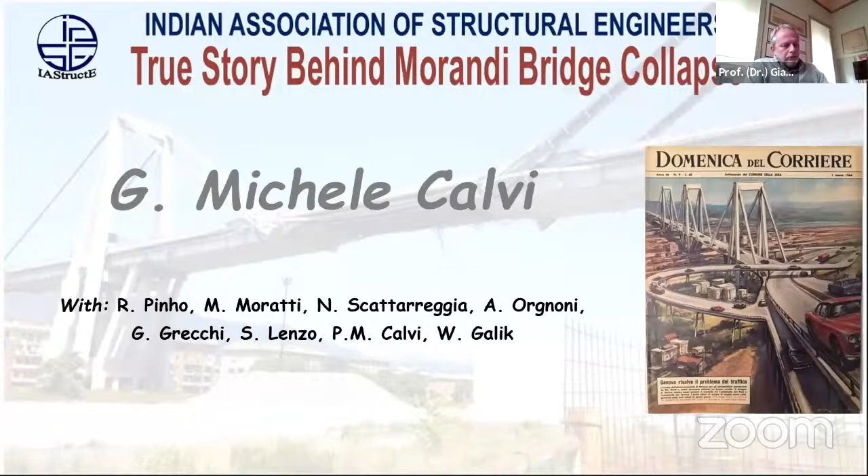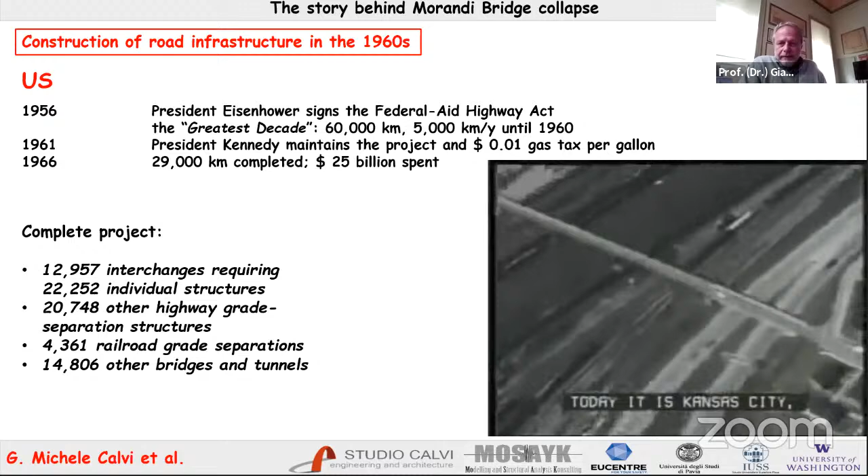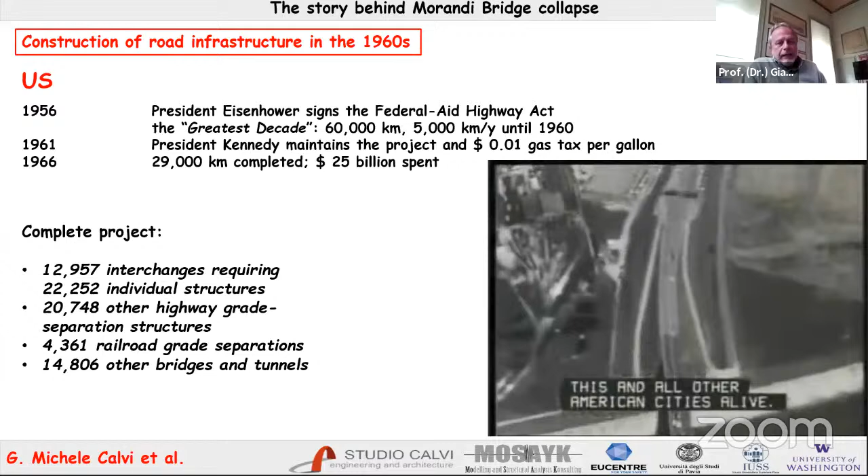This bridge was conceived in the early 60s and completed in 1967. It was a very special time for the construction of bridges and roads all over the world. In the US, the Federal-Aid Highway Act was signed in 1956 by President Eisenhower, starting the construction of the entire system of federal highways, which is still today the backbone of the road system in the United States. In one single decade, they were able to construct something like 30,000 kilometers of roads with an enormous amount of money spent.

What I'm showing is just a video that you can find on the web. I like very much to look at these very old videos and clips, where somehow it's a kind of story of a time, of an era.

In the US, this means that today they have a very high number of bridges that have aged and that can be in a difficult situation of maintenance.

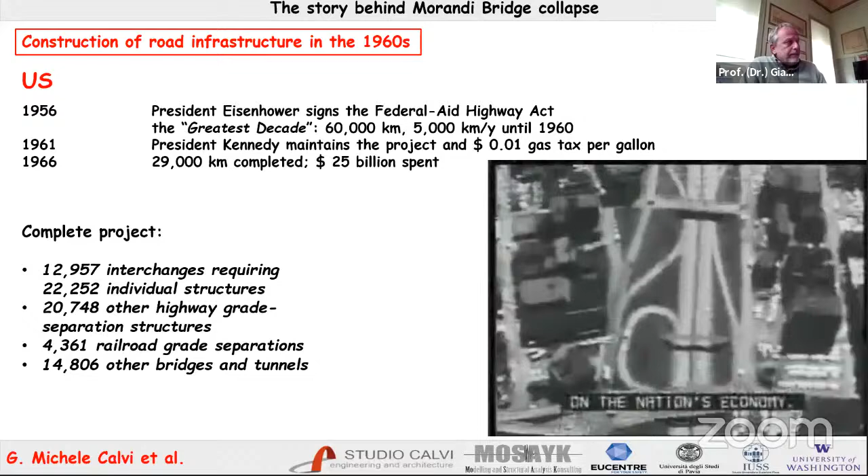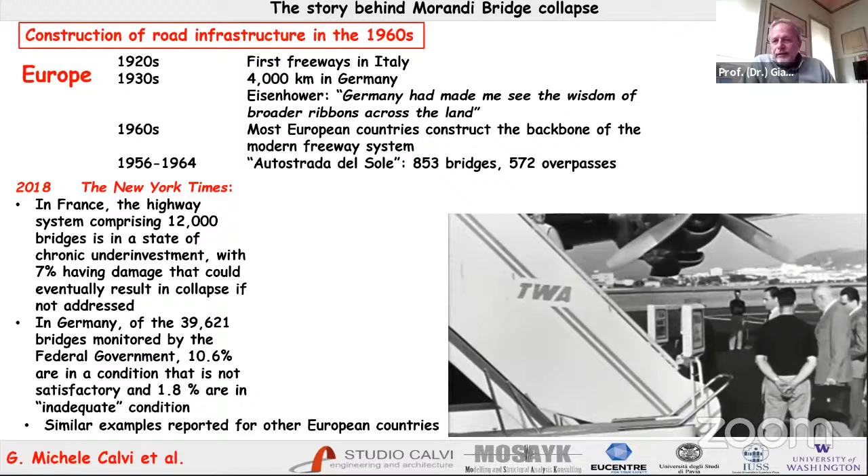But if we look at what was happening at the same time in Europe and in Italy, at a different scale possibly, this is another video that I hope you see. It's in Italian, so don't pay too much attention, but for me it's extremely interesting. This is the video of the construction of what is called the Autostrada del Sole, the freeway that goes all the way from Milan down to the south of Italy, also built between 1956 and 1964, crossing a lot of mountains.

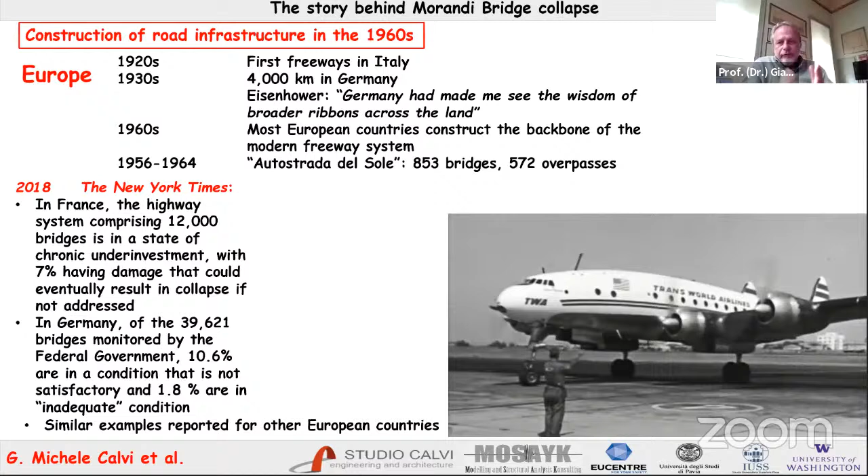You see Italian engineers going to the US to see what they're doing there and find out. In this single freeway, there are 853 bridges and 572 overpasses. So you can imagine and look at this, what you see now. It's an incredible way of construction for today, you don't do this kind of thing anymore.

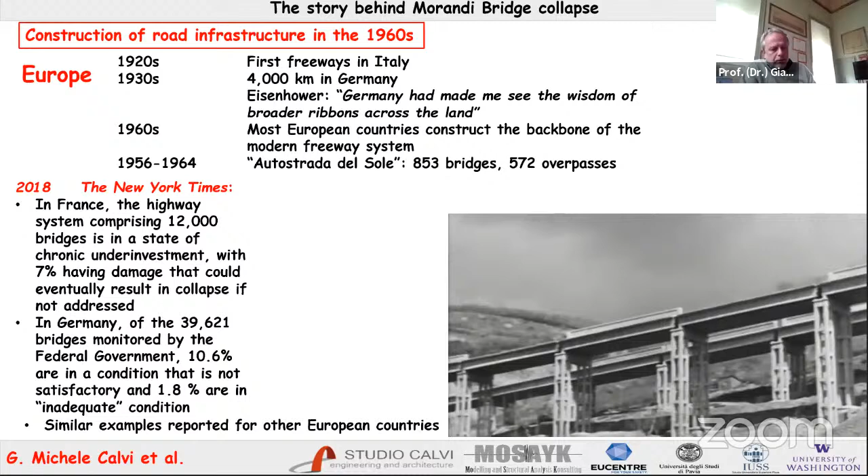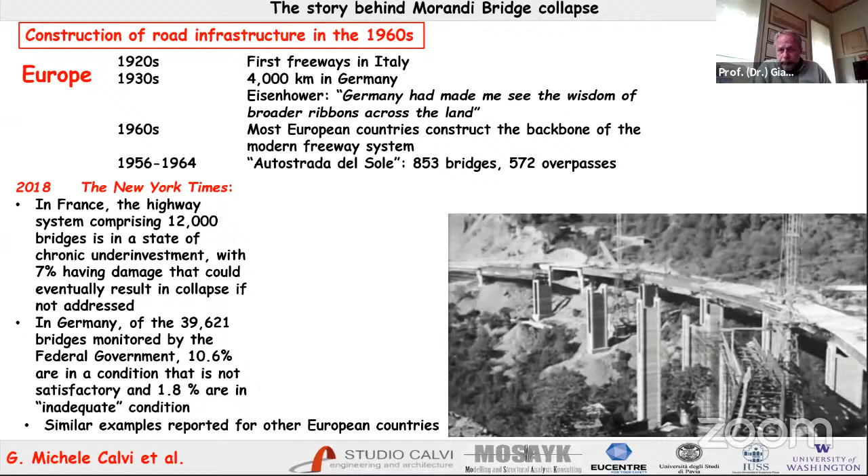But in Italy, we have a vast majority of bridges that are aged. Nothing like this happened anymore, well there have been bridges, but not so many. The same is true everywhere in Europe. In Germany, all the bridges were essentially bombed during the Second World War when the Allies entered Germany, and right after the war they were reconstructed, so most bridges have been built at that time. So the 60s have been a great time for construction, but we are now in a situation where a lot of bridges are in potential difficult situation of maintenance.

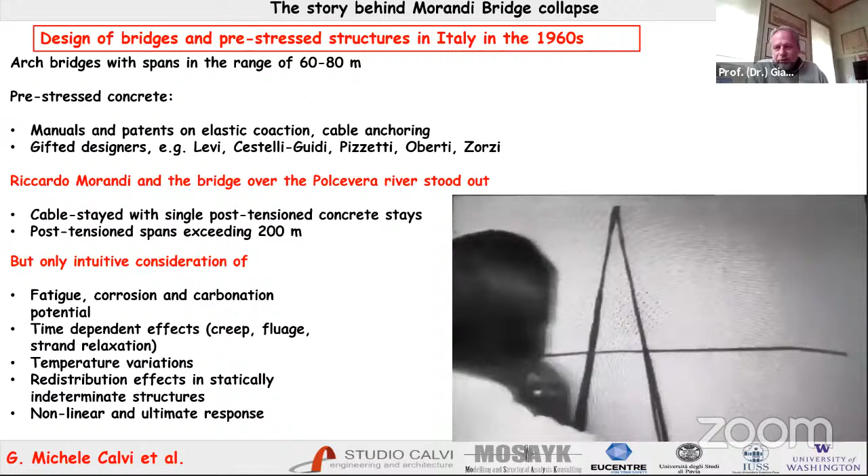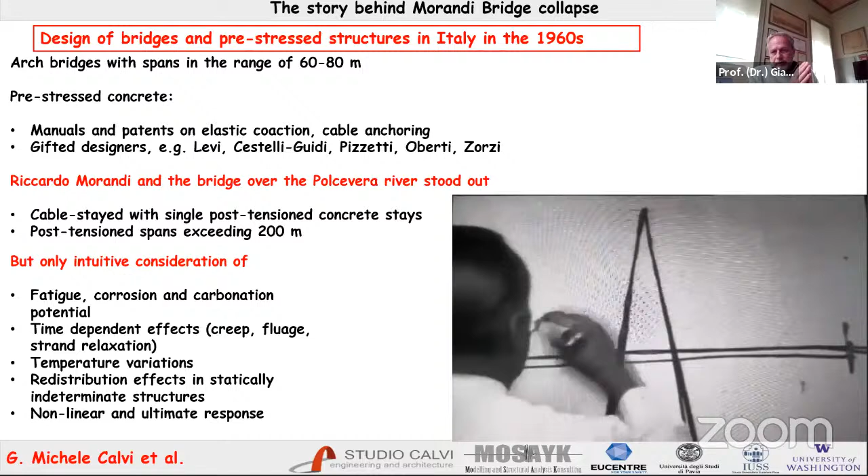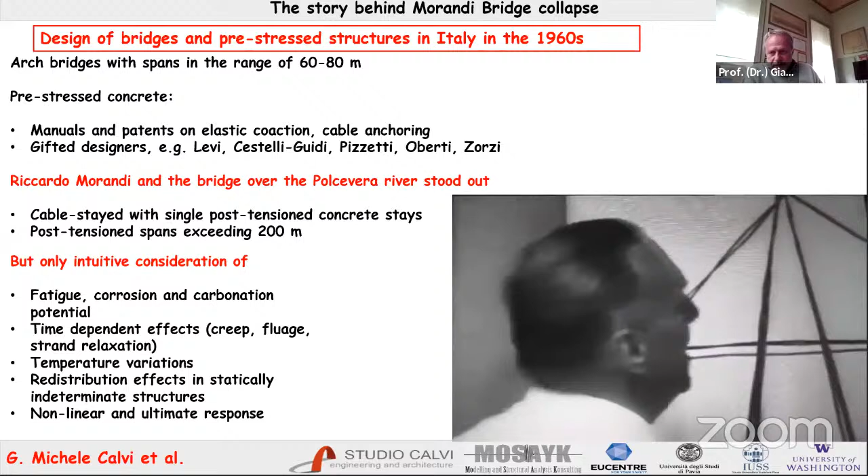If we continue looking at this, we should also recognize that the way of construction changed a lot. This person you see on the screen is Riccardo Morandi, who is explaining how he conceived the bridge that collapsed. He is explaining it in such a simple way that it seems too simple from a certain point of view. But it is important to keep in mind that after the Second World War was the starting of post-tensioning, or pre-stressing. The post-tensioning was known before, of course, but the availability of high-strength material, of high-strength steel, was not so easy.

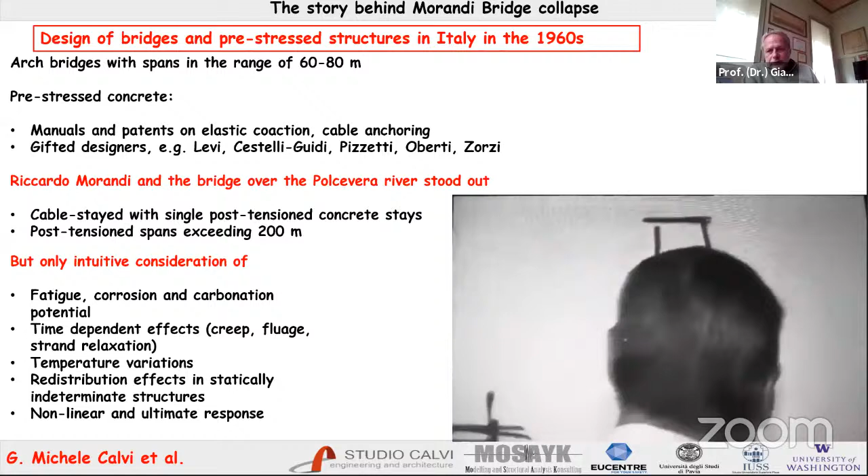It was only after the Second World War that the main bridges passed from arch bridges, which were probably in the range of 60 to 80 meters of span. After the war, they were still using this kind of construction, the one that came from earlier.

The Morandi bridge was a total exception. It was not common at all to have bridges spanning 200 meters. The only exception we all know is suspension bridges, built even significantly before the Second World War, with spans much longer than that, but these were still something not usual.

So Morandi designed this bridge in a very unusual way, something no one had been doing before. Don't forget, at that time structural software did not exist, so all the calculations were done by hand. Problems like fatigue, corrosion, time-dependent effects like creep, and strand relaxation were not so well known.

Morandi was exceptional in doing that, and he also took a lot of risk. We have to recognize he was a pioneer in this. This is also one of the reasons why there was this tendency to design and construct structures which are essentially statically determinate, to make them easier to understand.

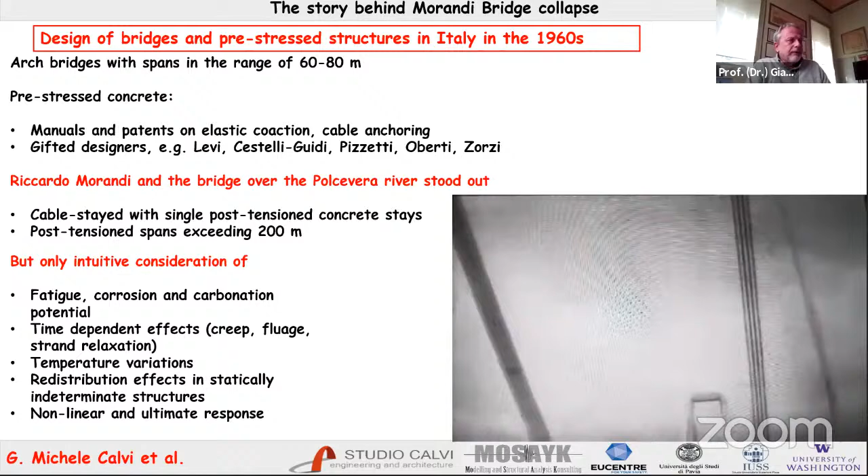In the 60s, there were not only a lot of bridges constructed, but it was also a time of big disasters. In 1960, there was the earthquake in Chile, magnitude 9.5, still probably the largest magnitude earthquake ever recorded. In '63, there was the earthquake in Skopje, Macedonia.

What was interesting there is that the first building isolated with rubber bearings was constructed. In '64, there was the earthquake in Alaska, magnitude 9.2, probably the largest one ever recorded in the North American continent. And not talking only about bridges, in '63 there was in Italy the disaster of the Vajont Dam.

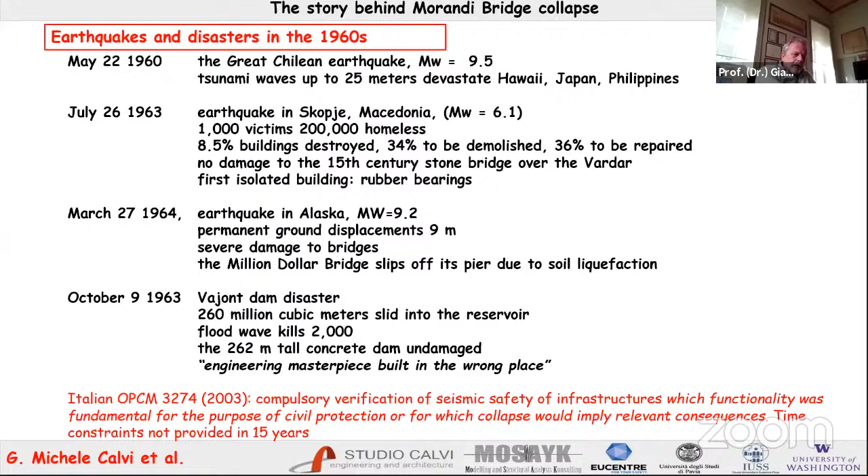It was an entire mountain that collapsed inside the dam. The dam was an arch concrete dam and did not collapse, it stayed there, but there was a big wave that passed over the dam, and more than 2,000 people were killed by the wave that went from the mountains all the way to the sea. This is just to put things in context at the time.

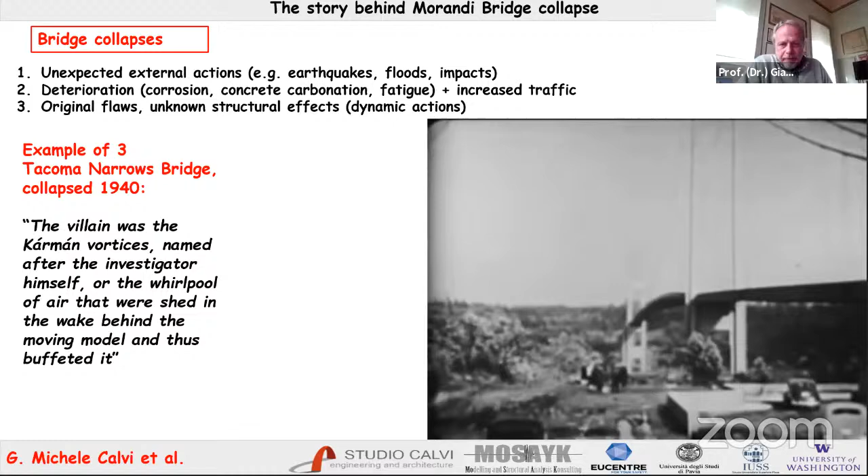Now a few words about bridge collapses. I think probably all the people listening now have seen this video, which is very famous: the collapse of the Tacoma Bridge, south of Seattle. I like to look often at this video, not because of the collapse, but to show students what the structure could do before collapsing. For me, what is incredible is that the bridge has not yet collapsed at this moment.

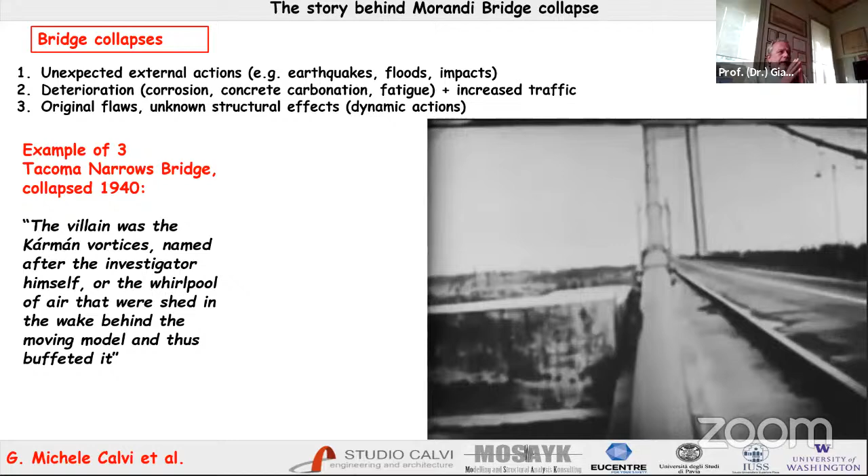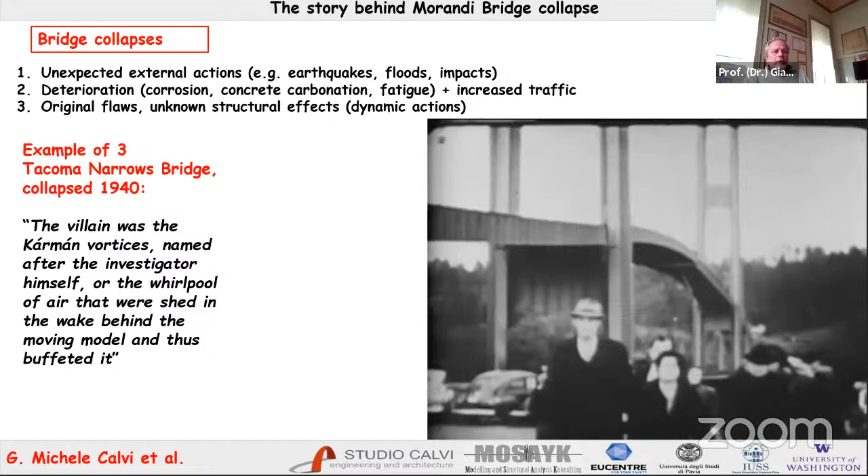This is interesting because this is one case of a bridge that collapsed essentially because of unexpected external actions. In this case it was the wind, inducing effects that were unknown. Unfortunately this is a very unusual case, because most bridge collapses are not due to situations that were essentially unpredictable, but are due to deterioration, increase of loading, fatigue, and so on.

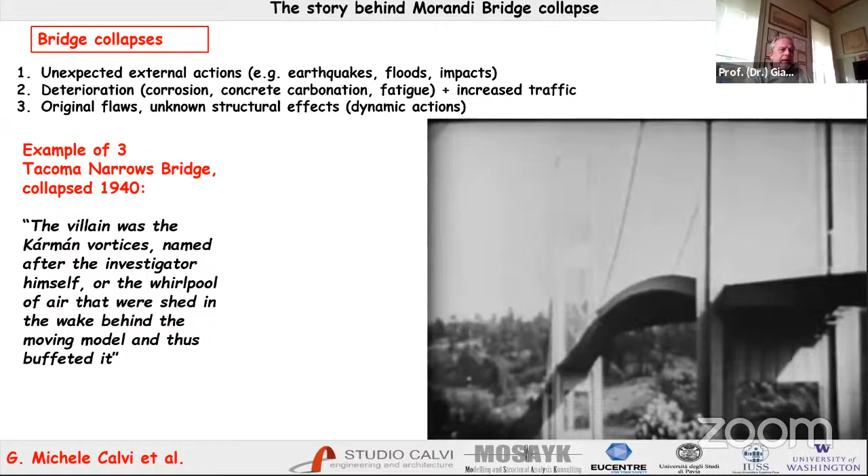Let me show you a couple of examples of this. One is the Laval overpass in Quebec that collapsed in 2006, killing 5 people. After this collapse, there has been a lot more study, particularly in Toronto, about shear problems in bridges. Look at the video on the bottom part of the screen: this is a very small overpass that collapsed in 2016 on a freeway not far from where I'm now speaking.

This is just the failure of the Gerber saddle, which was carrying the simple structure there. So this is something that probably could have been easily foreseen and even more easily strengthened before the collapse. I could go ahead and show so many bridges where the problem is not something impossible - it's not a big earthquake, it's not a strange wind, it's not an unknown effect of von Karman vortices, but just the fact that structures are not taken care of.

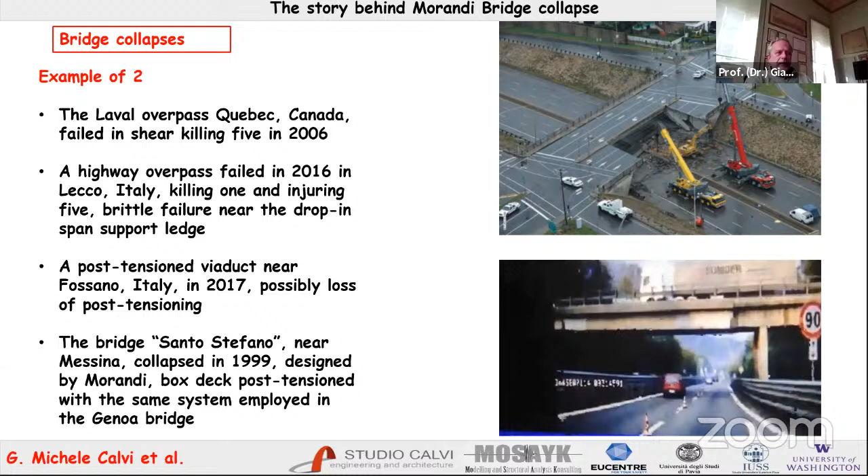Now let's go to this bridge. This bridge is very, very interesting.

The bridge, as you see in the top part of this slide, has three main spans. What Morandi was able to do was essentially construct this bridge without interrupting the railway traffic, the main lines going from Milano to Genova. It's a very important one. There was a river, and there was construction, and so on. This construction was done like this.

Each one of these three spans, the one that collapsed was called number 9, which I'm pointing to now. If you can see it, it's close to the river. You now see it in a red oval, and it's built by a pier. The pier was constructed in a rather traditional way, as I will show you.

But then there is a tower, an antenna, and this antenna is not touching the deck. The deck is supported, as I will show you, only in 4 points. The deck is very heavy, 4.5 meters deep, and it's essentially very strong in flexure. And there are 4 transverse link girders.

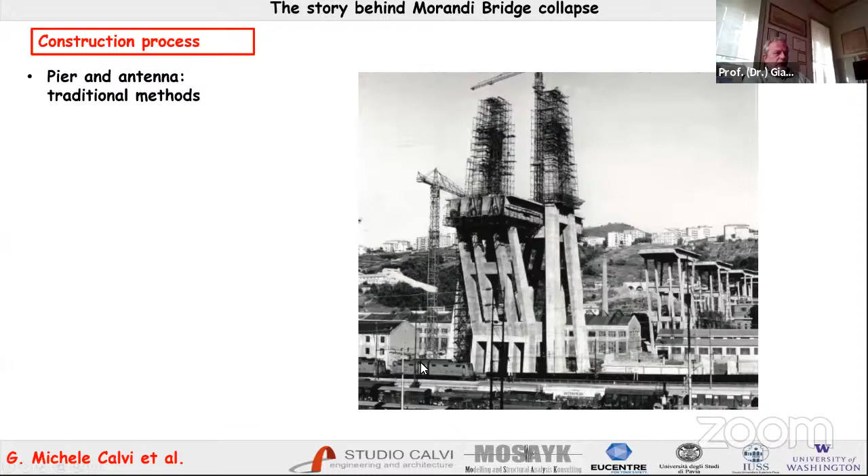If we look at how the bridge was constructed, we see the construction process was traditional for pier and antenna, with a small construction site. You see houses, a train passing by. They were constructing in the middle, going to the top of the antenna in a traditional way.

But then you look here, from this point on, they are constructing the main viaduct with what we today would call segmental construction. Each one of these parts was about 5.5 meters, and they were not sustained with internal cable, but with external cables. You can see the cables up here.

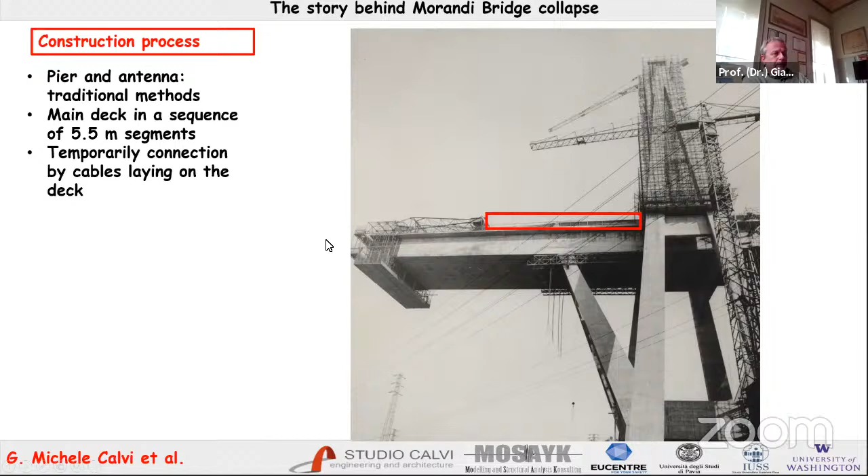So these cables, you see here, there is a saddle. The cable here is about 2 meters higher than the deck, and then these cables go down, and more are added as he goes ahead with more segments. When he reaches the end of construction, the cables are not working at all.

You have these temporary strainers passing here, then inclined and going down, taking care of putting horizontal compression and giving enough bending capacity. It's only at this stage that he was connecting the structure to the main cables.

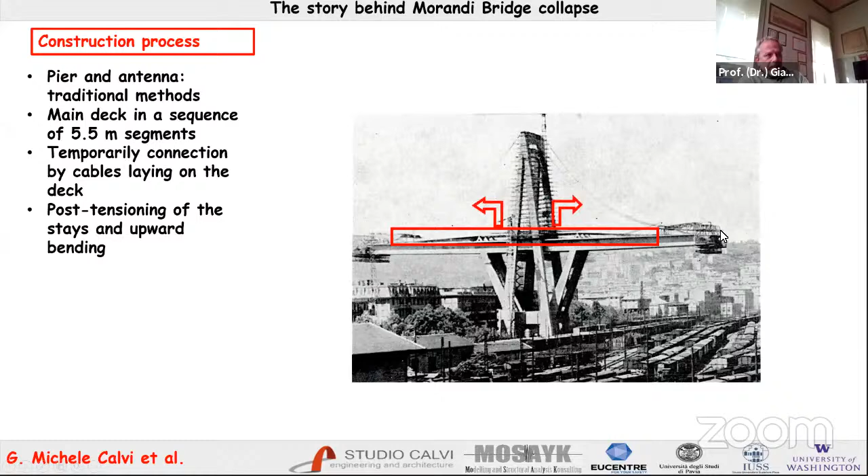You can see them here, and we need to spend 1 minute on this, because this was probably the most original point of Morandi's design. He was using main cables down here, and they were connected to the girder, to the viaduct.

Then he was casting some concrete around these main cables, and he was using secondary cables that you see are not connected at all, only to put the concrete in compression. Only when everything was finished did he connect the concrete to the viaduct.

This means there was an internal action such that the concrete was compressed by the secondary cable. And at this stage, when he was adding the live loads, the live loads were inducing only some decompression into the concrete without reaching a cracking situation.

So the stiffness of the two main cables was the stiffness of a full section of about 1 meter by 1.2 meters, so they were extremely rigid. This means there were small displacements, which was an advantage. There was no cracking because the concrete was compressed, and so on.

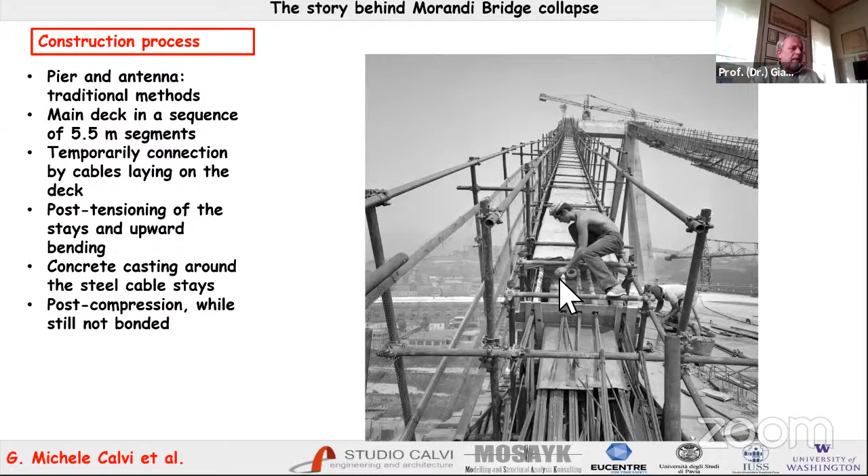The ducts are injected, and only at this stage you see this is concrete now. At this stage, the Gerber 36-meter span was added.

These were prefabricated beams, again something very unusual for the time. You need to pass on the bridge to be able to locate the prefabricated beams at their place, but he was able to do all this without any interaction with what was happening at the bottom of the bridge.

You should consider that locating this before or after completing the secondary cable makes a difference, because if you put it before, this is not reducing the compression in the concrete. If you're putting it after, it's reducing the compression in the concrete.

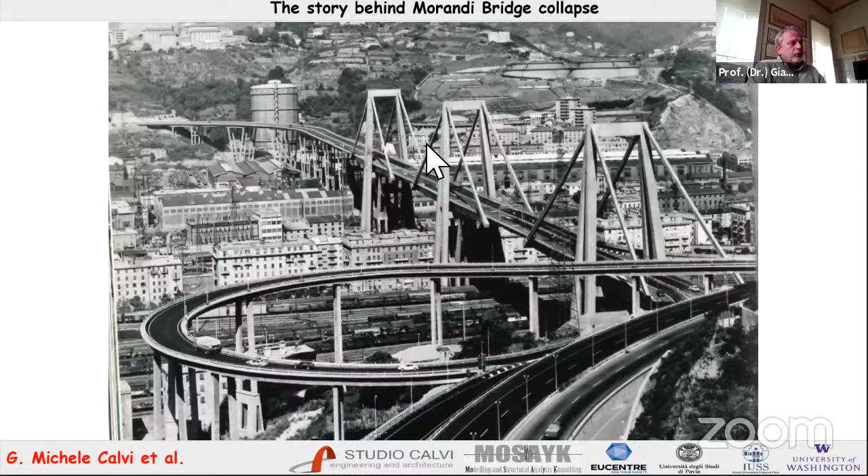Now, this is a beautiful image of the bridge completed, which was a masterpiece. It went on all the possible journals and so on and so forth. But now let's have a look in some more critical way.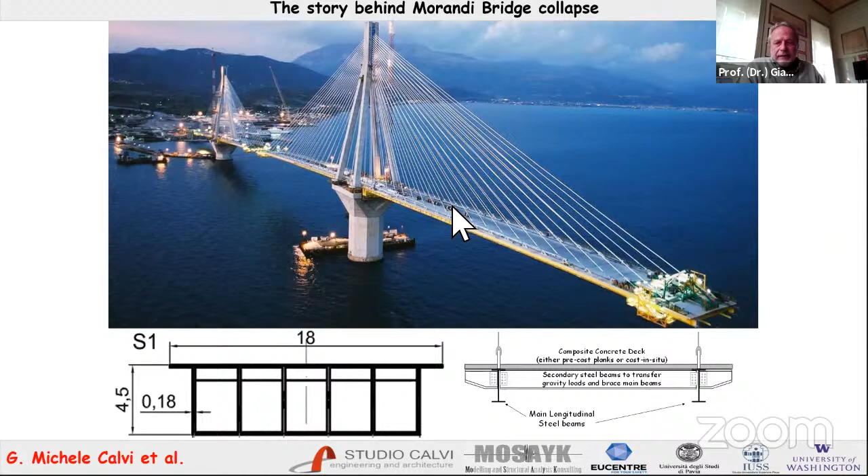Let's have a look in more detail at how the bridge was designed. Morandi had a patent on his own system for post-tensioning, and you can see this drawing is taken from his patent. What immediately comes to be noticed is the density of the cables.

It was very difficult to inject the cables, because the material for the injections was not as good as it is today. It was less fluid, and the space between the duct and the steel was much less. So this gives some hint about the possibility that the injection was not done in the perfect way.

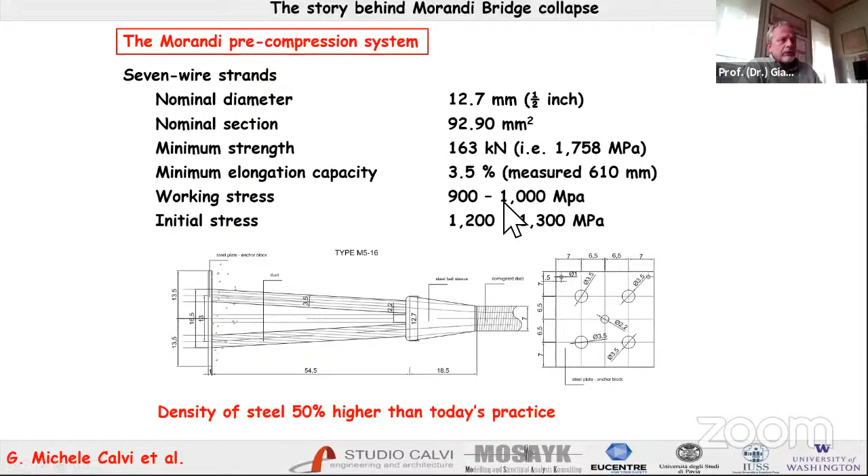But if you look at the cable, it's very different from the cables we use today. Morandi was able to work at about 1000 MPa in his steel strands.

The other thing you immediately see, this half of the viaduct of the deck - you can see that there is some distributed steel, which is very minor. But if you look at the main steel, you have some post-tensioning cable here.

And you know why? Where the cable is coming down, and you have some post-tensioning here where you are supporting the deck from below, and you have some cable here. There are even regions like this one here where there is no post-tensioning. And you know why?

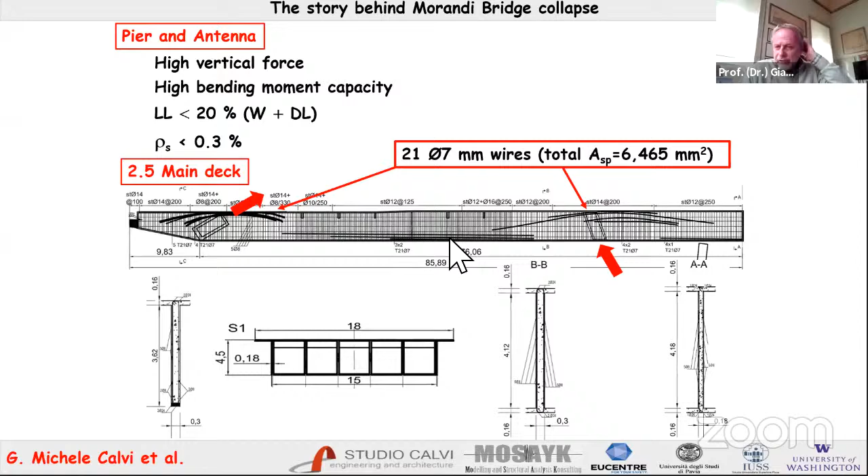Because he was counting on the compression coming into the deck from the tensile force in the strand. So you should imagine you have this force here, this diagonal force here, and here in the deck.

There were, as I was saying, the transverse link girders, this one here, the red arrows, and there were the cable stays. The cable stays were made with 464 main cables at half inch diameter, of which 352 were the main ones, and 112 were those used to post-tension and put the concrete into compression.

The force induced by the weight was inducing a tensile force in the cable of about 12 meganewton, and the force induced by dead load was more than 10 meganewton, but the force induced by the maximum conceived live load was only...

What I'm trying to say is that this bridge is a very heavy bridge, and the variation of forces induced by live load is very small with respect to the forces already there because of the self-weight and dead load.

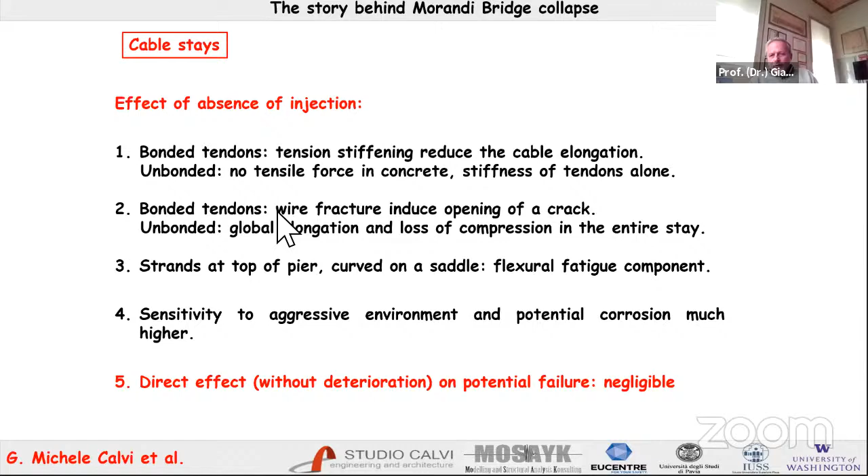The capacity is the same. So the direct effect on potential failure from whether the cables are injected or not is very minor. If we talk about the potential for corrosion, that's another story—we will talk about that. The fact that water and moisture can penetrate and travel along the duct can favor corrosion, but if there is no corrosion, there is no problem.

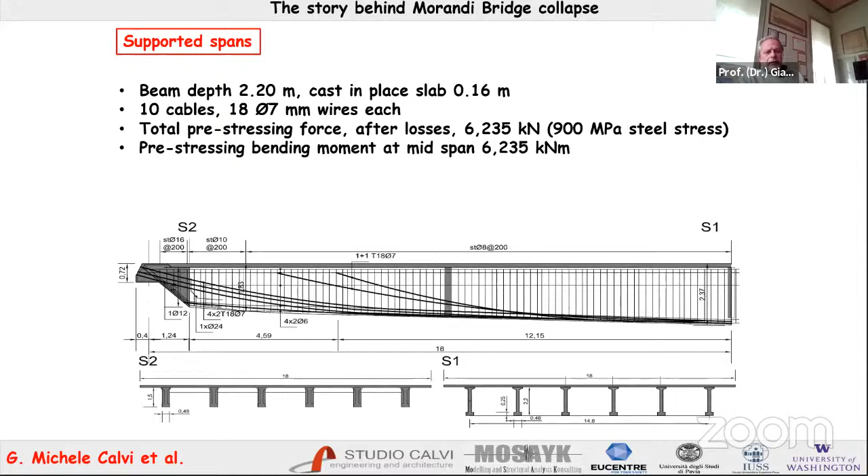If we look into the supported beams, they look very much like a traditional simply supported beam of today. You see here the distribution of the cables, with 6 of these prefabricated beams with a variable section. The one on the right is the mid-span section, the one to the left is a section close to the support. These were pre-stressed, and again, there was no problem in this one.

Now we have to spend a minute looking into what happened over the years. Morandi himself started being worried when he was still alive, because people noted there were some cracks that were not foreseen. So he was worried, and I'll focus here on one intervention because in one hour there's not enough time to discuss everything.

In the early 90s, it was decided to strengthen one of the 3 main piers. The justification for strengthening Pier 11 is that they found a lot more corrosion in Pier 11 than in Pier 10 and 9—9 is the one that now collapsed. You can see that in Pier 11, they decided to completely replace the tendons.

In Pier 10, they did some strengthening only at the top. In Pier 9, they only added some protection to reduce the possibility of water entering. Strangely enough, in what they wrote in those years, they were foreseeing a limit condition for corrosion in the year 2030. So probably this is the beginning of the process that concluded in 2018 with the collapse.

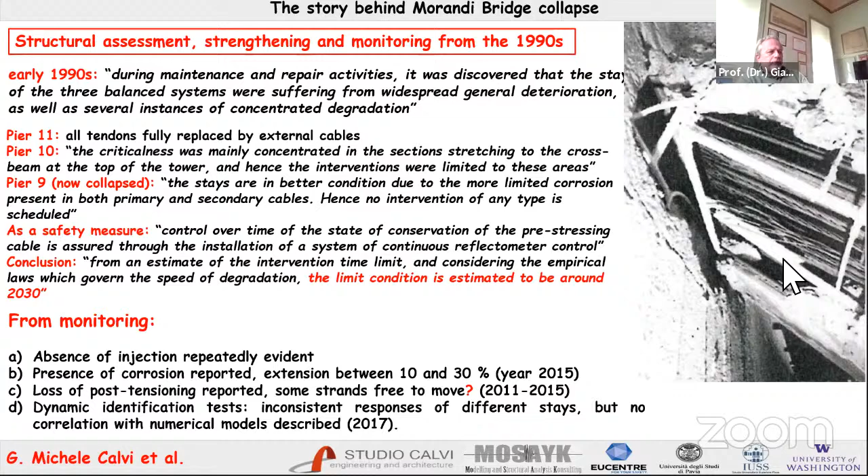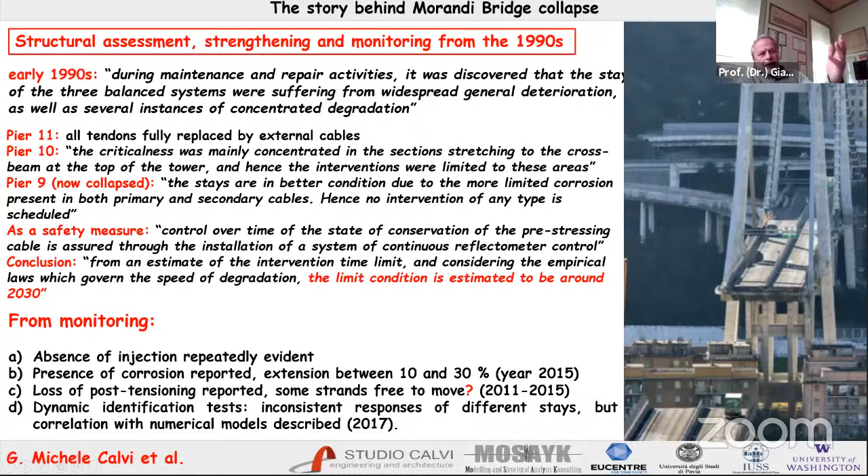In this slide, okay, Pier 9 is not there anymore because this was taken after the collapse. Pier 10 is here without any evident strengthening, and Pier 11 is in the background, where you can see the cables have been completely replaced—or at least you can intuitively see that there is something different.

Now, the next step when we started looking into this was to try to estimate the member capacity and see whether the design of the time was similar to what we do today. So we looked into a number of problems, and it was clear that there was some deterioration of the stay strengths, which we had to determine was relevant or not.

There might have been some deterioration of the stay strengths that we had to look at. There might have been some elongation of the stay cables because of this deterioration, and this might have favored some shear strength problem in the deck, which was, as you remember, very stiff also from the point of view of bending. There might have been some local failure in some part of the deck, or some shear failure in the simply supported span.

We started to investigate all these potential problems without having any real insight from the debris remaining after the collapse. So we used SAP 2000, MIDAS, OpenSees, Seismostruct, and the applied element method. I will show you something of all this, but let's first have a very simple look.

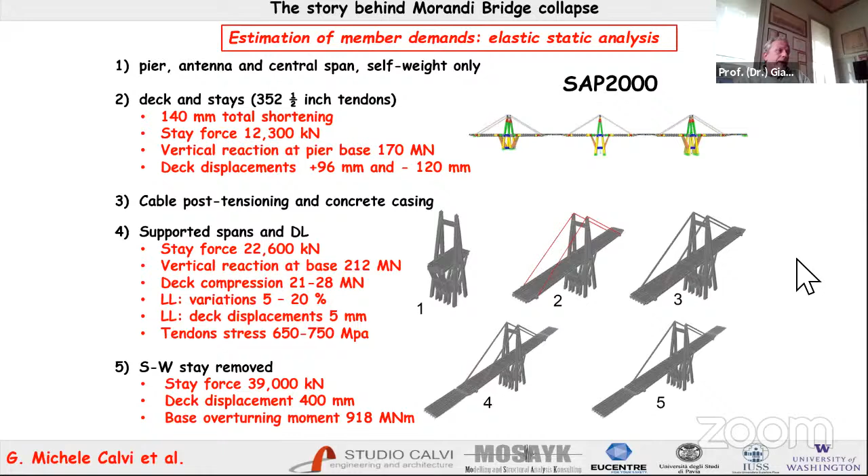You see here a modern, simple elastic model of the three main spans. The results we obtained are very similar to those of Morandi. Actually, the capacity of the stays was much higher than the demand—one of the stays was capable of taking more than 40 meganewtons, so more than 2 times the actual tensile force. From the point of view of bending and shear capacity, even if you remove one stay, the other is capable of taking the entire force. But there are problems that I will show in a minute.

We also did some seismic analysis to see what was the dynamic response of the bridge, and we found that for the seismicity of the location, the bridge was essentially fine.

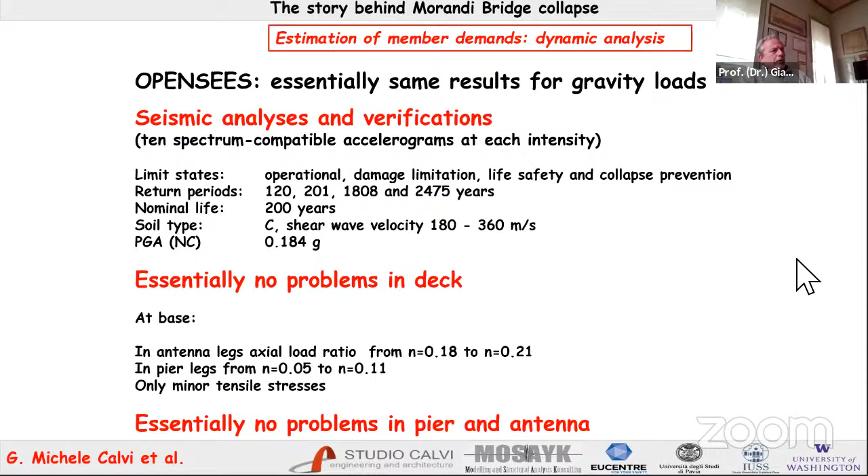of what is the action in terms of bending, and the capacity is in gray. You see that the points showing the capacity, 1, 3, 2, are much larger than the maximum possible demand, even including a seismic event. The capacity is calculated using a complete nonlinear analysis.

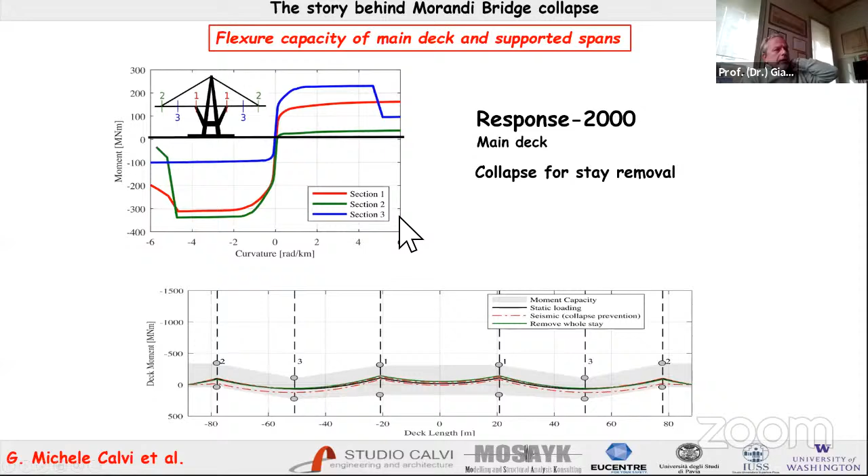And if we look at what happens in terms of shear, something similar happens. The capacity is much larger. The capacity in the deck is much larger than the demand. No problem at all. And we apply the modified compression field theory, and you find that there is no problem.

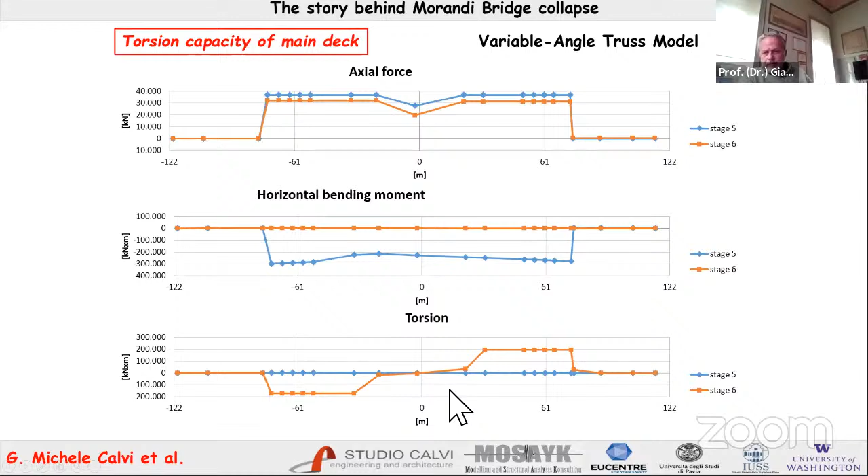Of course, when you remove one of the cables and see what happens in terms of axial force in the deck, there is not much difference. But in terms of the horizontal bending moment, the moment in the plane of the deck, you have a large bending moment because the deck is now supported on one side only. So you have a deck that can rotate in its own plane, and of course you have a lot of torsional demand because you are supporting the deck on one side only.

And if you now look at the torsional demand and capacity using the variable angle truss model, you find that the demand could be larger than the capacity. So what I'm trying to tell you is that if you remove one stay, you can have a shear torsional failure in the deck because of the in-plane bending moment and because of the torsional applied moment.

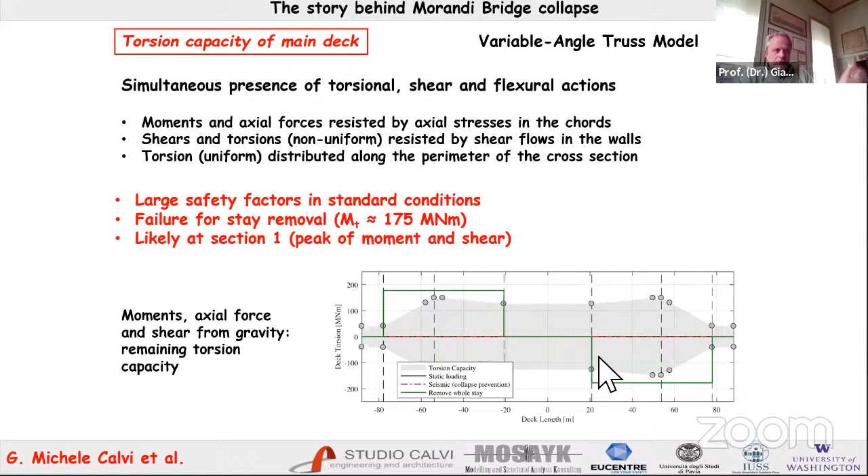So we could conclude this by saying that if you have a problem in one of the stays, you can have a problem in the deck and everything could collapse. This is somehow a temporary conclusion. We will go ahead on this to say, okay, this collapse might have been originated by a problem in a stay and then continuing to everything that happens. What could have been inducing the problem in the stay?

Well, it could have been a deterioration due to corrosion. It could have been a fatigue problem. It could be a combination of these two. It could also be an exceptional load that we will discuss in a minute.

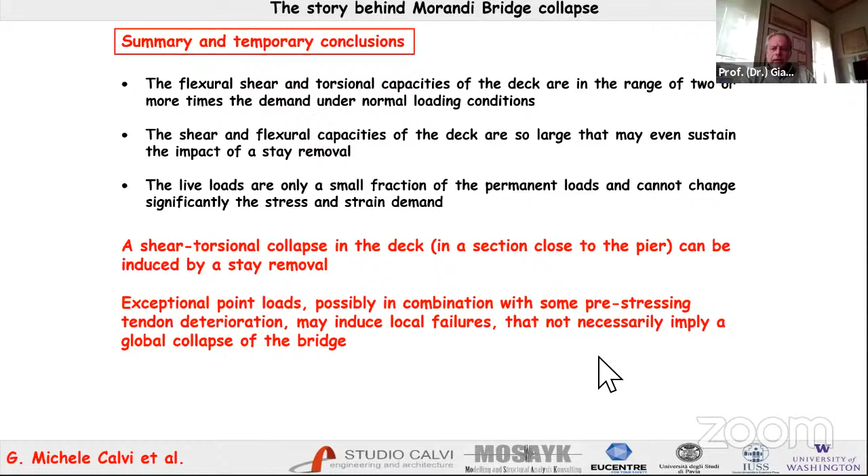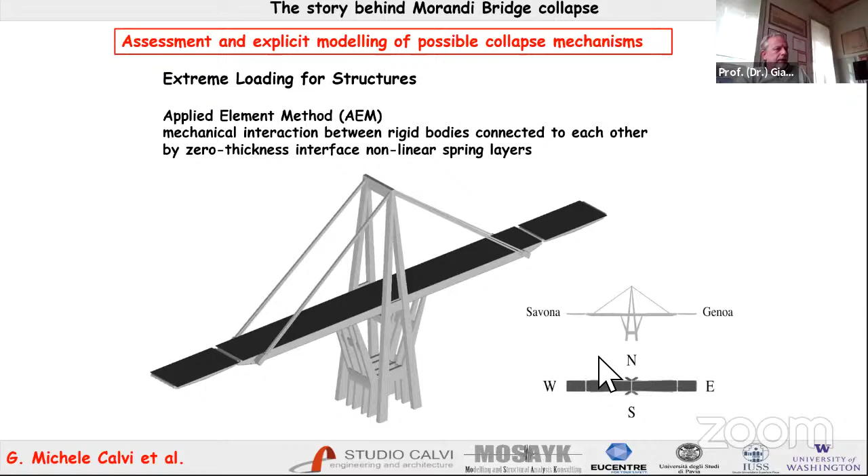So have a look into this, and we now use a very advanced modeling. This model uses a software which is extremely expensive, and is a model that we developed with more than 500,000 degrees of freedom. This kind of software is made of small, completely rigid parts connected to each other by deformable elements. And in connecting the small parts, we were representing each single

rebar, each single cable, and so on and so forth. You model all this, and you come out, and first of all, you check and compare the results of this modeling with other kinds of modeling, and then you see what happens. And for example, you see what happens if you increase corrosion, if you reduce the section.

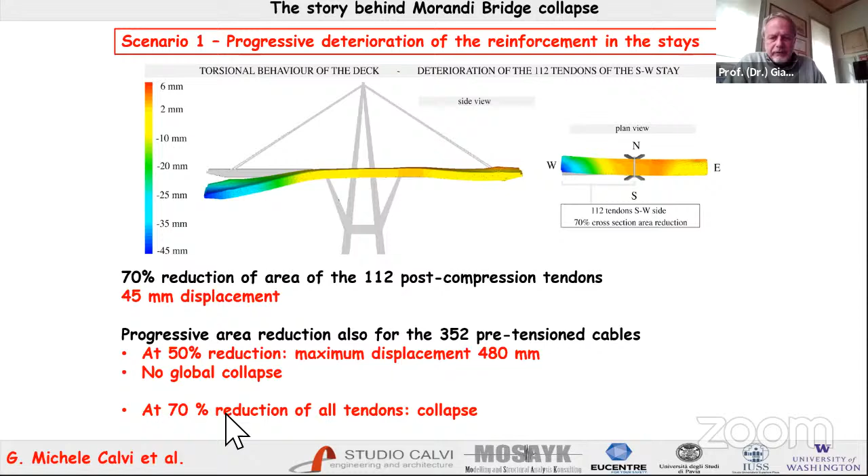And you see that to arrive at a collapse by reducing the section of the cables, you need some 70% reduction of the section of the tendons. You need an extremely advanced state of corrosion. If you have, say, 50-60% corrosion reduction of the section, you have a large displacement. But if you have this large displacement, someone would have reported a half-meter displacement of the deck. So there is something that is not convincing us.

And what happens if you have an impulsive load? Why is an impulsive load of interest? Because right at the time of the collapse, there was a truck with a big steel coil transporting it. And it might have happened that the steel coil was falling from the truck onto the deck.

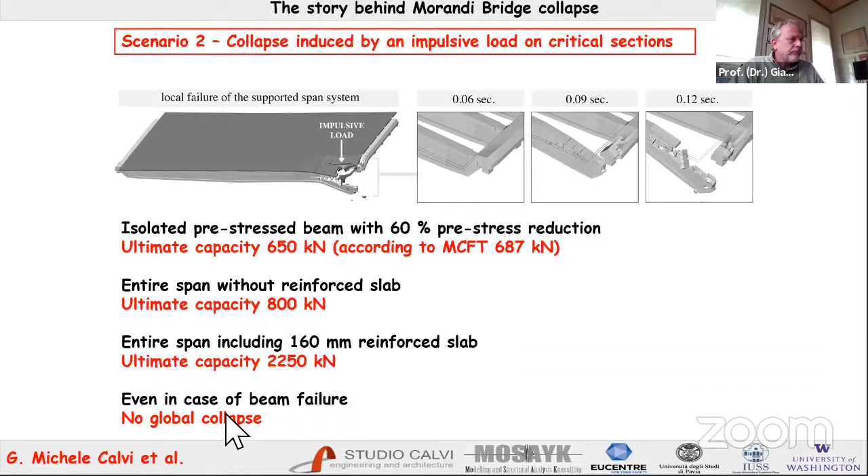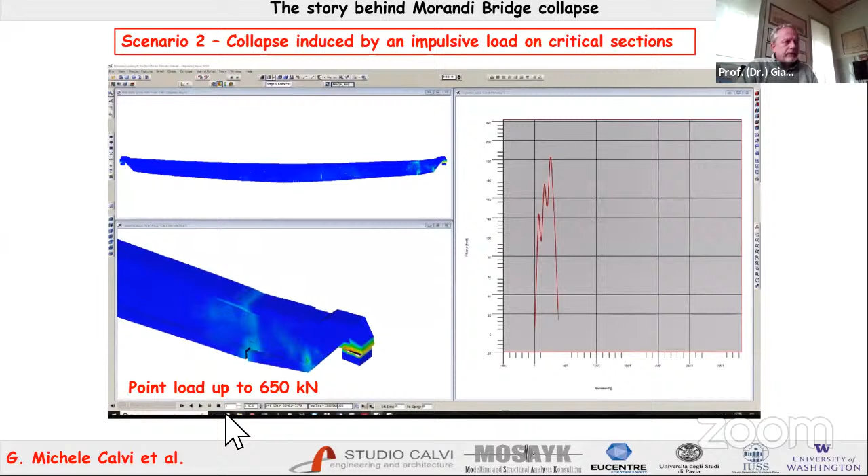Now, what is the capacity then? We analyze this, and if we take only one of the beams of the simply supported spans, you see that with a point load of about 650 kilonewtons, you have a collapse like this. If you consider the entire grid, the load increases to 800, but of course you need to have the coil drop exactly right there. If you also add the slab on top, then you need more than 3 meganewtons point load to induce this kind of local collapse.

The total weight of the coils was approximately 30 tons, so it was about 300, not 3,000. But if you include the dynamic amplification, it could be compatible with something like that.

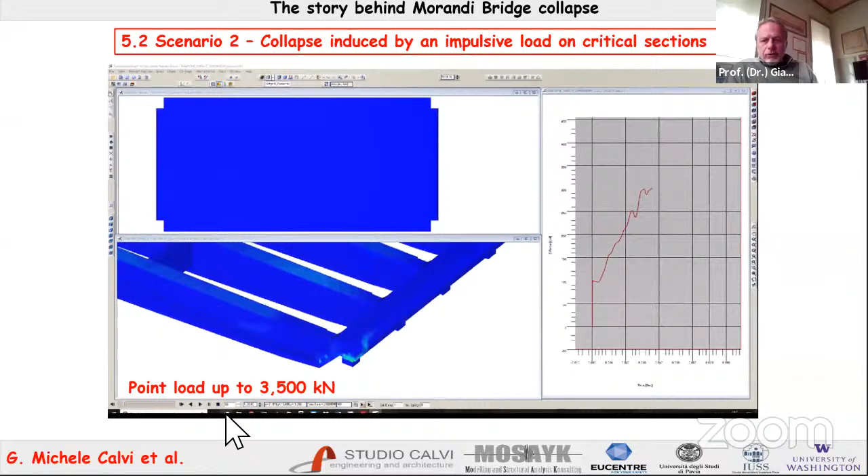But is this inducing a total collapse of the bridge? The answer is no, in the sense that we modeled the possibility of having the failure of the simply supported span. You have the bridge that oscillates like this, but then it stays again. You can see this in this slide: it goes up and down, and then it stops. So if you have a point load, an impulsive load collapsing there, you may induce the collapse of the simply supported span, but it's difficult to induce the complete collapse of the bridge because of that.

As we will see later, this can be a possible trigger of the collapse, but not because of the collapse of the simply supported span, but because of the increased tensile load in the cable, in the stay. If this adds up to a certain level of corrosion, this could be the trigger. We will see it in a minute.

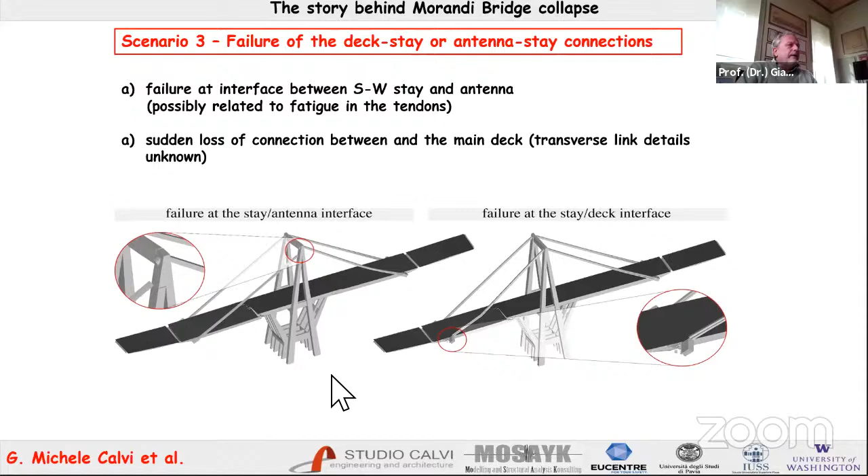Our conclusion, again a temporary conclusion, is that we might have had a collapse at one of the stays, at the top there or at the bottom here, and this might have induced the collapse of the entire bridge. What we did was look into this problem, and I will show you a video clip in a minute. These are single shots taken from this video.

This is at 2 seconds. So the trigger point now is to release the top of one of the stays here and see what happens. At 2 seconds, this is released, it starts moving that way, this other cable is released, and then you start having the shear torsional failure that I was discussing earlier.

At 4 seconds, you start having pieces that are falling on the ground. You see rotation of pieces, like at 4 seconds here. I hope you can see my cursor. If you look here, you see that this is rotating, and this is rotating.

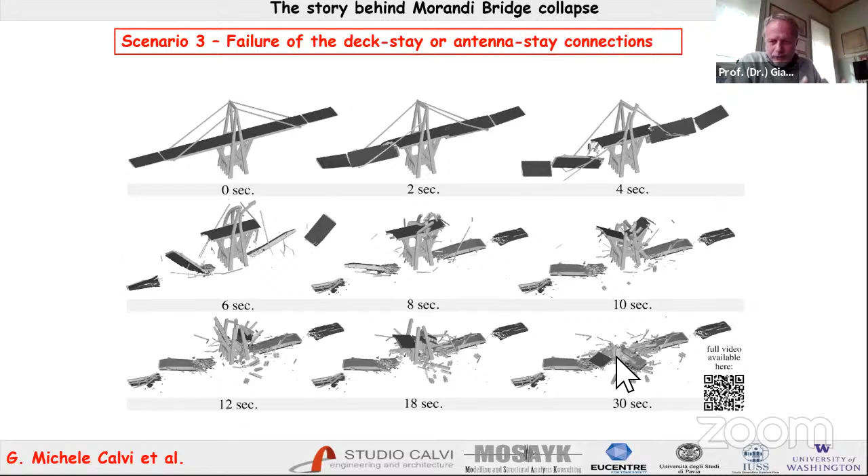Why is this important? To see whether this reconstruction is faithful or not, one of the pieces of evidence we could use is the location on the ground of the different parts of the real bridge, and to see whether the final location of the parts in our model is consistent with the location and rotation of the different parts of the real bridge.

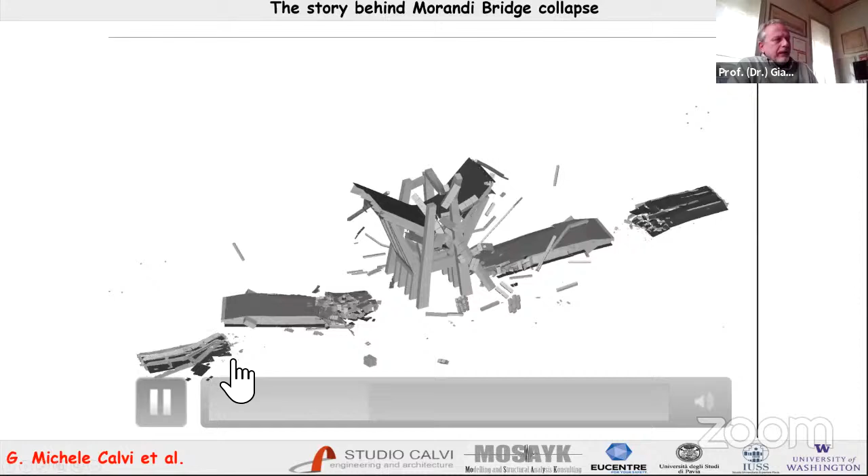So you can see now, I stopped it. Let me. Okay, you can see the video. I think this video was done more than a year ago. I will show you something else later on. I insist on this because there was no evidence of anything — we did this just using our capacity of analysis. You can see that you have a certain distribution of the different parts of the bridge on the ground.

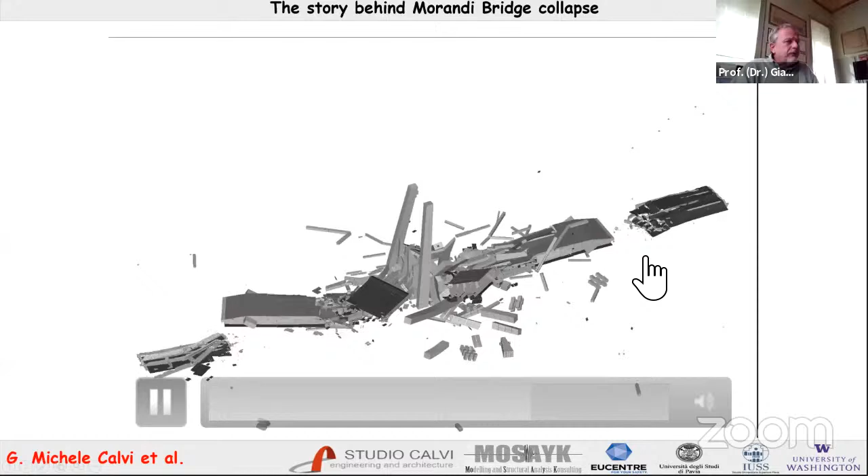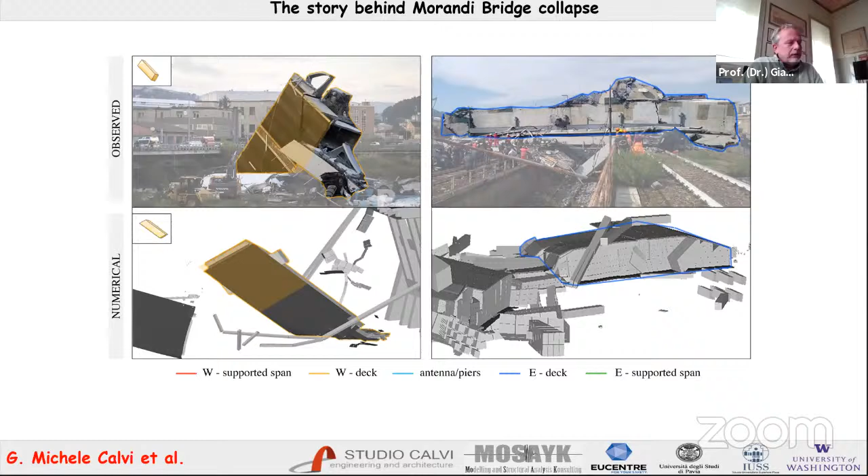These are other comparisons, and this was something that was published more than a year ago — for sure more than a year ago. And this is the paper that Alok was referring to, that got some recognition.

Now, at this stage, we are only able to state that all original elements had ample margins of safety. Variable live loads have little influence. Live load cannot have been the trigger of the failure. A progressing reduction of the steel section and the concrete compression in a stay would result in large increased displacement before collapse. And an exceptional point load can induce a local failure, but is unlikely to extend into global collapse due to this local failure.

We found that the bridge was essentially fine, and we concluded in our essay that the loss of one stay could be the final cause of collapse, and the possible initial cause could have been corrosion fatigue or possibly combined with an exceptional point load. This was done before having any access to the evidence.

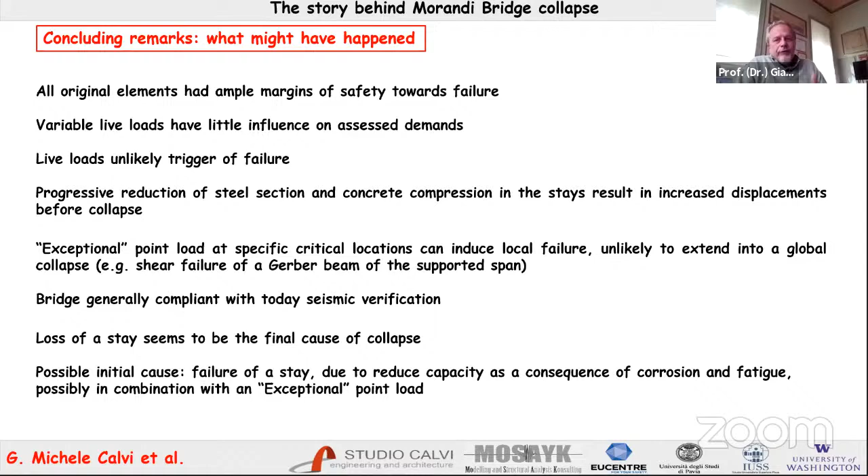Now I will tell you something I've not presented anywhere, not published yet, that comes from evidence from the court case. I'll do this in about 15 minutes, though these 15 minutes could easily become 2 or 3 hours if I entered into all the details I now know. The first point that came out of the material available from the court was a video, which was kept secret before. I'll show you the video now.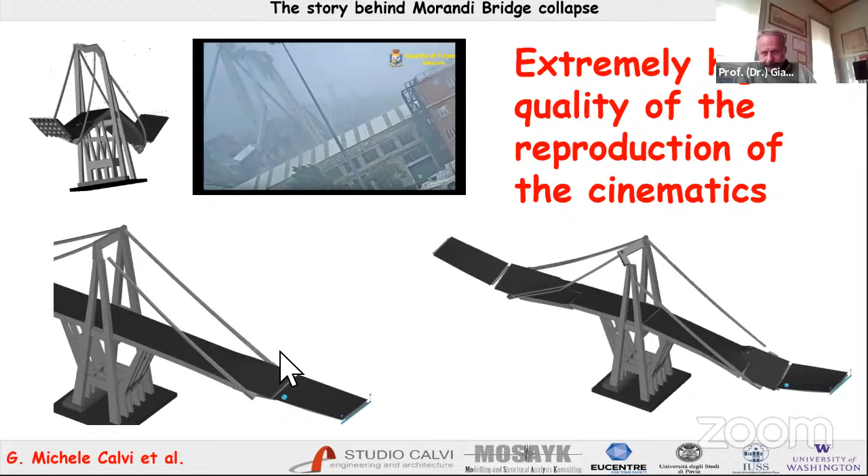This is possible only if the situation of the top part of the cable is deteriorated enough, because otherwise there is no way. So let's have a look into this.

First of all, you see here a reproduction. In the upper right image, you see the truck, you see the coil that in this reconstruction has fallen from the truck and hit the deck, and you see a reconstruction of what might have been happening. These reconstructions are consistent with our model under the assumption that the coil falls down there.

But to obtain this, we have to look into the situation of the top part of the southeast stay cable. I could show you hundreds of slides, but I selected only three to show you some main issues.

You see these are part of the remaining debris. We've been able to cut through. This was the top part of the antenna, you can see it here. Look, if you don't see my cursor, I am pointing to the upper right image, where on the left part you see the antenna, and coming down toward the middle of the screen, you can see the cable.

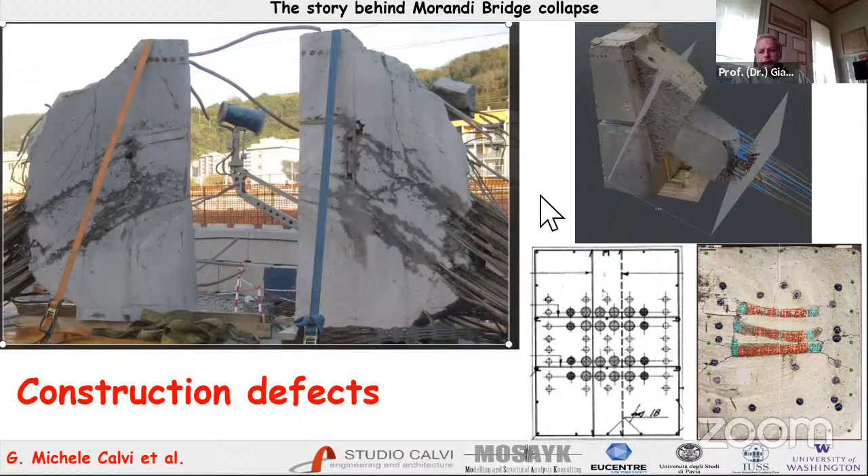This part of the debris was there, and it was possible to cut it in different ways and see the situation, which was very peculiar for several reasons. One reason: in the upper 2 meters, there was not the duct, so the cables essentially were just simply embedded into the concrete.

This means, and we have been producing a lot of very detailed models on this, that there was internal micro-cracking due to the anchoring of these cables. This internal micro-cracking could have been favoring the moisture and water penetration into the cables.

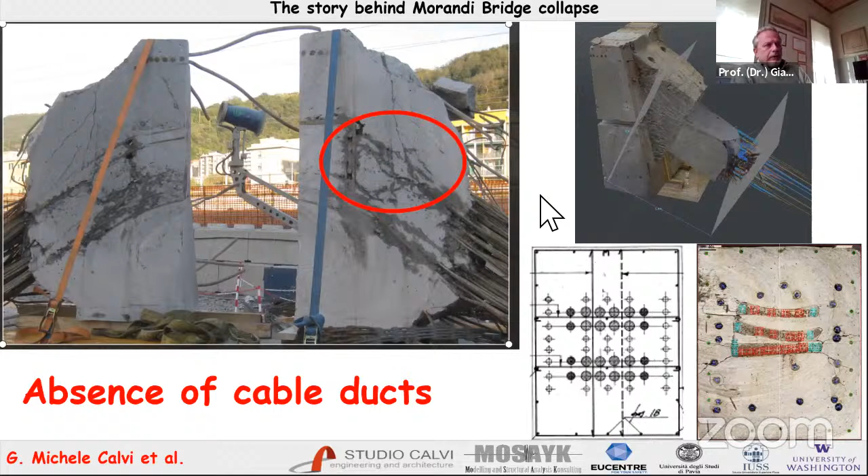A second big point is that there were large voids found around the cables in the region about 2 meters from the connection. So imagine the upper part, which has no ducts, cannot move, is anchored. It opens micro cracks, and then a bit further down you have some half-meter void or something like that. So you have penetration of moisture, presence of water, and localized corrosion.

In other sections, there was very little corrosion found. This gives us an explanation for why there was not a significant elongation of entire cables—it was a localized problem. That region was weaker, and it was weaker because of several local problems.

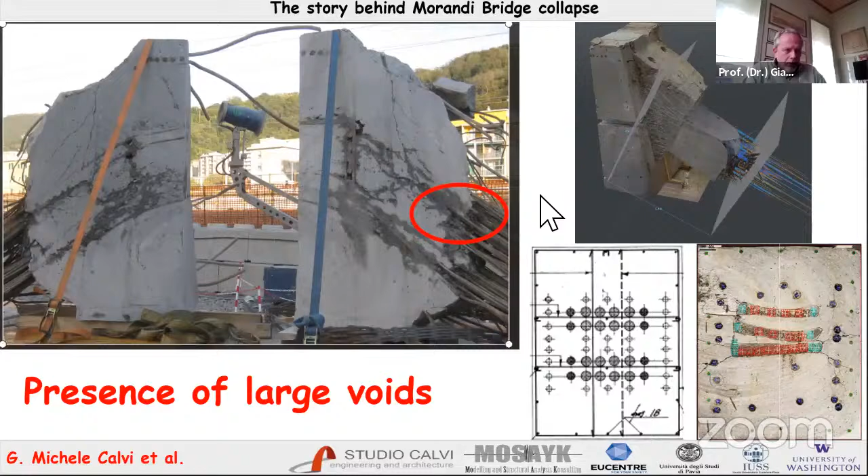Here's a third important issue: during construction, they were not very careful in the proper location of cables. You have a comparison of what was designed versus one of the section cuts, and look at the distribution of cables—they were somehow packed together.

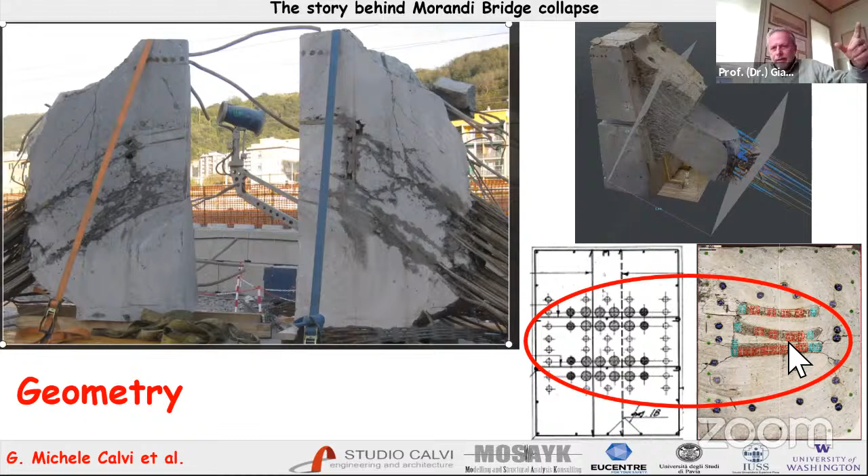And if you have moisture entrance, you can have all sorts of effects—I'm not an expert in corrosion, I've seen the work of others on this, but it can favor the progression of corrosion in a localized part. So now the situation is more clear: what could have happened is a local loss of capacity, and then the falling of the coil causing an instant increase exactly where there was an unknown reduction of strength.

And look at this, this is another section cut through. Look at the distribution.

What you see in red here are the main cables. What you see in blue are the secondary cables, those used to post-tension the stay. And what you see here in green is just ordinary reinforcement.

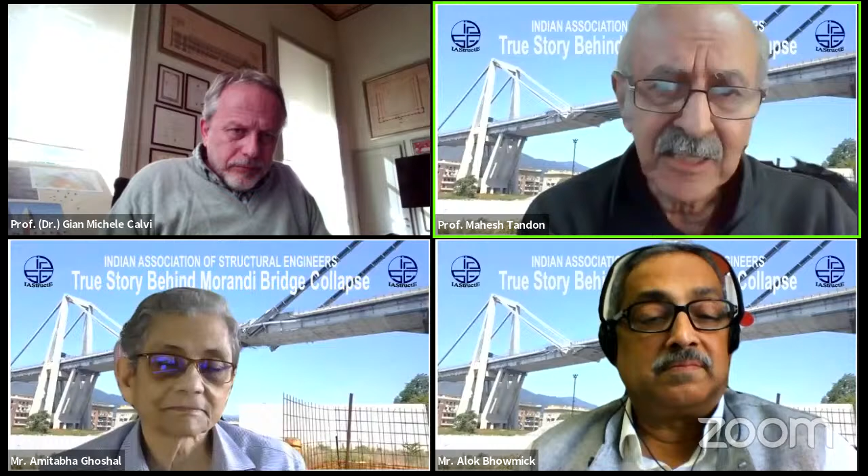I think back then, when this bridge was constructed, engineers didn't really think in terms of durability. Also, disproportionate collapse, or the lack of indeterminacy in a structure and what importance it holds, never really occurred to engineers at that time. If it did occur, I think it was probably somebody more senior who said, hold on, let us do the design first. These are my two conclusions. I would like Professor Calvi to respond to whether I have come to the correct conclusion that these were the two reasons why this collapse took place.

But before he answers the question, I would like to say a few words about engineer Riccardo Morandi, who inspired a generation of structural engineers with his bold designs. I was one of those engineers, and that's why I can talk about it. I think that during, let's say, the middle of the 20th century, there were some great concrete bridge engineers: Eugene Freyssinet from France, Jean Muller from France, Fritz Leonhardt from Germany, and Riccardo Morandi from Italy. I think these were the four names that stood out at the time I was really involved in major bridge designs in a big way, designs which were perhaps beyond the experience I had at that stage.

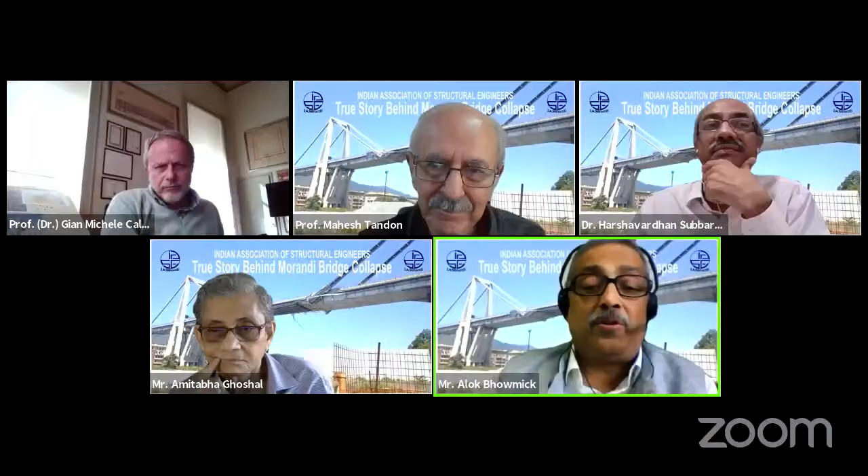I was just wondering - this Morandi bridge was one of the unique bridges at that time of construction, even today. And it was designed by a person who was a legendary figure at that point in time, because Professor Morandi was very, very famous after the Maracaibo Bridge in Venezuela. Now, when you have an iconic bridge like this Genoa Bridge, why he was not involved during the construction is a little surprising to me.

Any comment, Professor Calvi? The reason is very simple and very common. He was not working for the authority who was paying for the bridge - he was working for the construction company. There was a call for bid. He worked for the construction company, they got the project, and then the construction company decided to go ahead with construction without needing him. That's it. He was not hired by the Federal Highway Administration or whoever - he was hired by the construction company. That's it.

So now we have our third panelist, Dr. Harshavardhan Subbarao. He is the chairman and managing director of a leading consulting firm, Construma Consultancy. He holds a PhD from Imperial College London. He is a governing council member of our association and vice president of IABSE Zurich. He is a member of IABSE Task Group 5.1 on forensic engineering, and Task Group 1.5 on international database of bridge failures, and also a member of the editorial board of Forensic Engineering Journal of ICE UK. He carries the legacy of his legendary father, Dr. T.N. Subbarao, who is very well known in the international fraternity as well. Over to you, Dr. Subbarao.

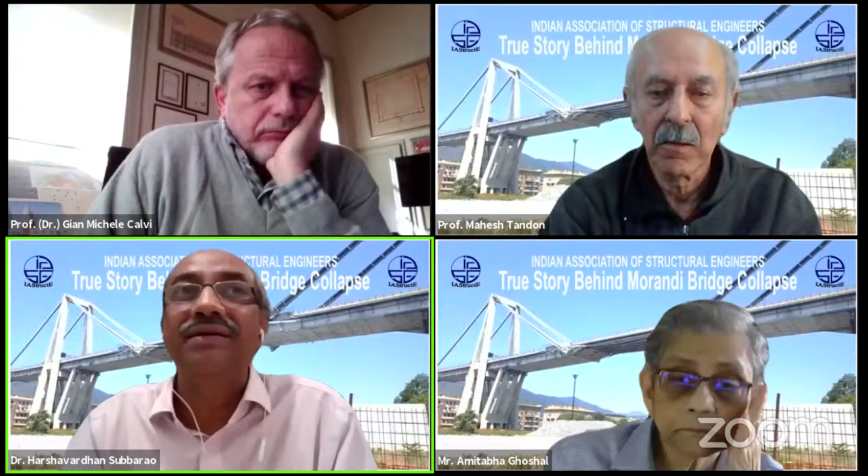Coming to the other way of looking at it, as we do in our task group: first response and preliminary assessment, development of investigation strategy, which is what you saw, fact gathering and document review, engineering analysis to determine causes and responsibilities—who is responsible—and reporting. So I think we saw all this, from a set of postulates coming down to a very narrow regime of where the possibility of failure lies, the reason, how it triggered, how it happened. It still remains not 100% a fact—it remains with a little uncertainty. Did the coil fall or not?

We don't have pure evidence about it, so that's the unsure part. This is what I wanted to share with you. And this presentation is a classic modern day case. Now, two things I want to ask, if I may.

Why were GPR tests not done to detect the voids? Because they're linear and should have detected a large void in a linear element, and GPR is very small and compact. They could have been done. Now, if they weren't done, we don't need radiography, we don't need anything. This was sufficient to detect any void.

Just asking, if it was done—it wasn't done at that time in '96 or whenever they did these investigations. The other moot point is of the towers that remained, the two towers, or the one tower that remained largely unscathed, the standing tower—did we also go and detect these voids? Was any specific examination done at the two points where they could be released, either at the bottom of the stay or at the top of the stay, the failure mode and the twisting shear torsional mode?

That could have been precipitated by either the break at the bottom or the break at the top. Those two points surely should have been investigated in the standing structure before it was blown up. This is just a question that would have been a huge lesson for us to have learned, if it was done.

And the last thing I want to ask you is about the practice in Italy—worldwide, we address the differences in practice in forensic engineering. For example, in India, if there is a death on a collapse, then we have a criminal procedure code, and there is death by negligence, and negligence will apply, then that invokes the criminal procedure code. But if there are no deaths, it can largely go by the civil procedures code, where nobody is injured. Then we can invoke the civil procedure code. So they're two separate streams, and it's all written down law, and that practice is followed in India, with maybe expert witnesses giving evidence.